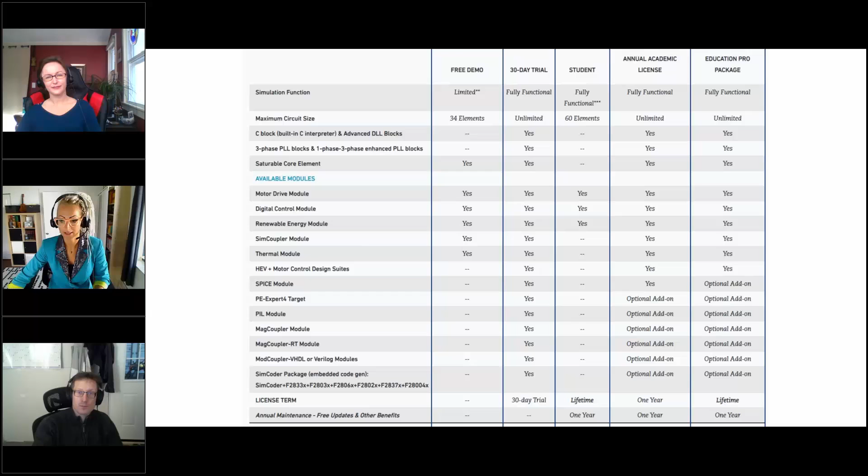Okay, that sounds great. Let's dive right into the first license option here, which is the PSIM Demo. Shannon, who is going to use this demo, or who is it going to be useful for?

A lot of students, especially undergraduate students, professors having them download it for teaching needs, or just anybody who wants to get familiar with the software before they start using it on a job, or just in general.

But it's not just showing the software. You can actually do some work with this? Yes, you can. There is a limit for the number of elements you have in a schematic, but there are hundreds of elements available, and there are limitations for simulation, but you can use it to do work.

Okay, cool. Albert, can you maybe show us an example of what can be done with this demo version of PSIM? What kind of application? Sure can. Let me share my screen. You should be looking at the right screen now. You should see that flyback converter.

Yes, great. Okay, so this is a simple little circuit, just one of the demo circuits. So if you run it, there's kind of two major limitations with the demo. One is component count, and then the other is the length of... sorry, that ran in the wrong engine.

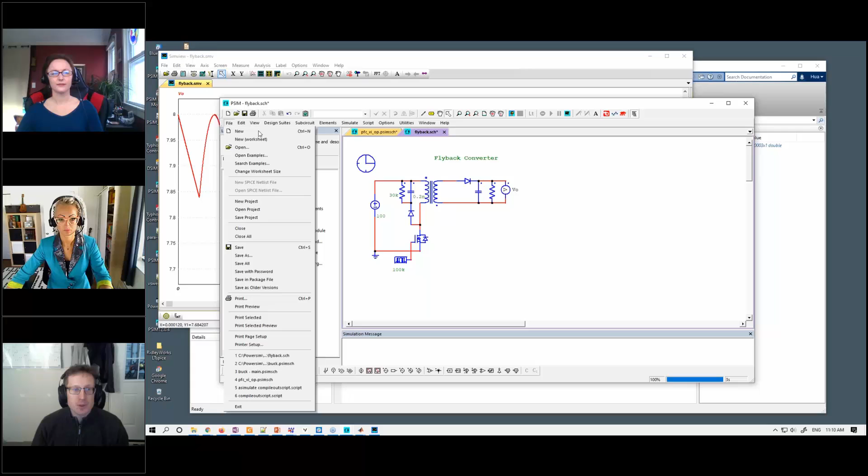So that is a combination of time step and total time simulated. And then you can see how many elements you're using — you can do element count, and we can see in this, there's 10. So the element count limit is around 34 for the demo.

So you could do something like this as well. This one has a number of more elements, and we can see that it's running, and it'll show some waveforms there too. So this is just the sort of thing the demo has. It allows for some simulation to be performed, but definitely for undergrad learning power electronics — simple buck and boost converters will be okay. But otherwise, anything more complex, and you're going to need to move to a different package. That's all I've got to say.

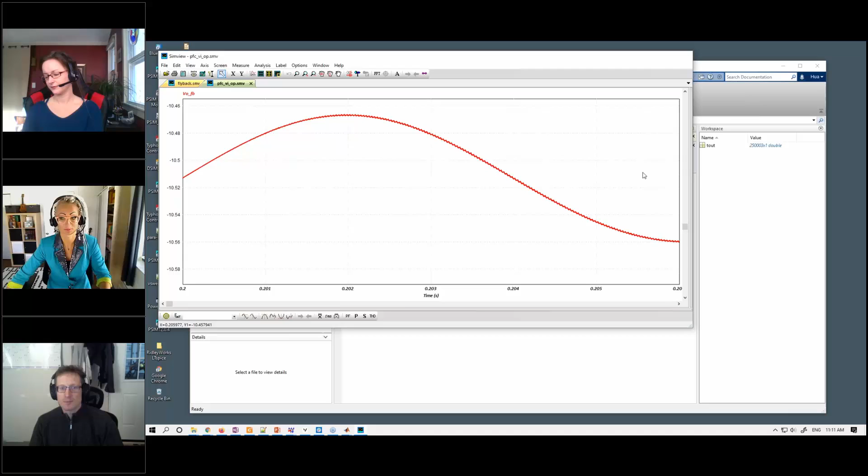Oh, okay, sounds pretty good. But it's interesting to see that this is not just a demo — you can actually do stuff, and it's free. So what more can you ask for? Exactly.

I'm going to take back the presentation here. Can you guys see the presentation again? Yes. Okay, good. Then let's get to our next license option, the next tier up — a student license that is also called a free teaching license. Shannon, why are there two different names for the same license, and what are the differences?

Sure, so they're both the PSIM student version. The student version increases the element limitation to 60, and it takes away the simulation restrictions. The PSIM student license — an individual can purchase it. It's a lifetime license, as it says here, $99. The free teaching license is really just to distinguish the license that a professor or teaching assistant from a university can request every year if they want it renewed — it's free and available for teaching.

So the difference is really just how long the license is valid and the price. Right. But functionality is the same. Same, Albert, functionality. Yeah. Which kinds of applications can be simulated here with this license, and where are the limitations compared maybe to the demo?

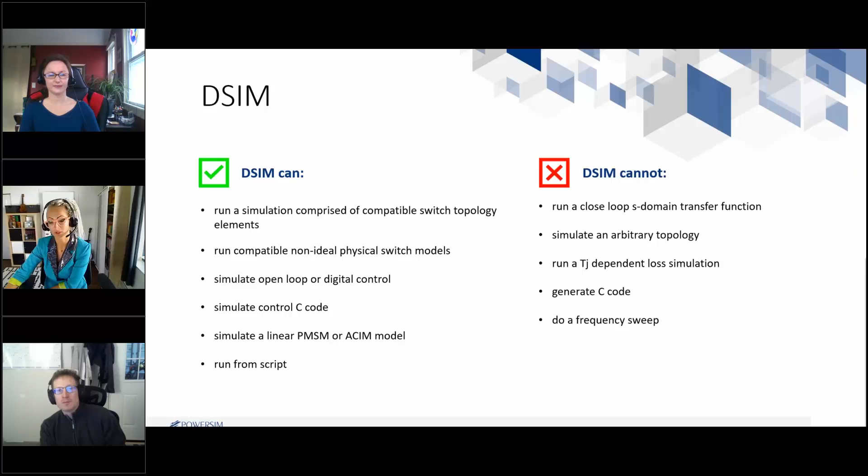Since we talked about DSIM, we might as well also talk a little bit about SmartControl. What is this used for, and why is it a good tool to use?

So SmartControl, if you've watched any of the tutorial videos I've done on power supply design, or come to any of the webinars where we talk about closing the loop, SmartControl is the tool I use. It is a graphical design tool. It plots a stable operating space for you with regards to crossover frequency and phase margin. It shows you graphically what relationships you can have when you design a PI controller, a Type 2 or a Type 3 controller.

You can work off a generic topology, or you can import your own frequency response, so you can even close the loop on things that are not power converters. If you have any frequency response and you want to design a controller for it, you can go from there. It's fairly robust. Once you are familiar with how it works, you can start doing things like defining equations for custom controllers or doing all sorts of other things.

But it's definitely a very easy to use graphical control design tool. As you tune your controller, it shows you the Bode plots for the loop gain transfer function, and it gives you a step response estimation. So it's a fairly powerful tool. Most of the tutorial videos that cover power converter design use SmartControl, so you can check it out there.

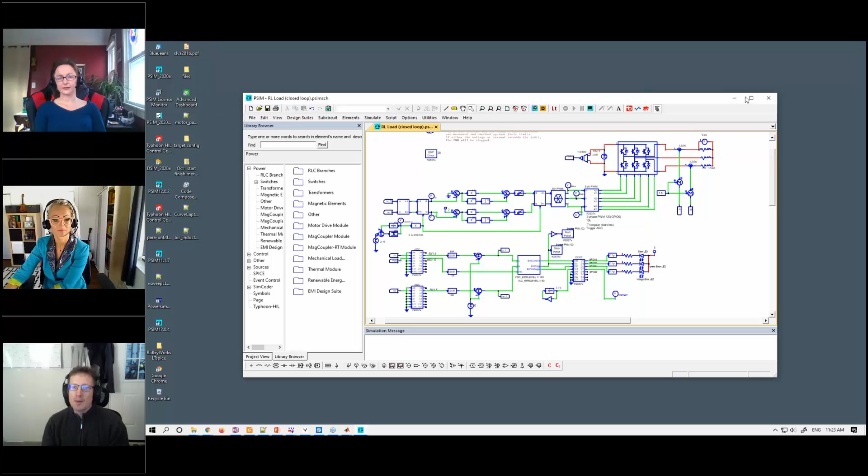Perfect. So the first simulation I'll show is a look at our motor control design suite. This is a good simulation that can be done with the Pro package. So we have an IPM drive here with an inverter. We've got field-oriented control, we've got MTPA, max torque per ampere control implementation, and field weakening.

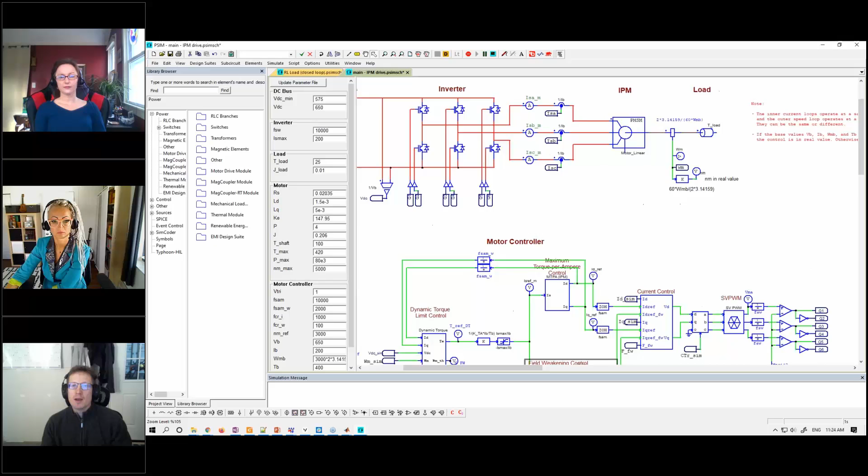Let's just run the simulation and we can watch what's happening here. So this is going to ramp up to 2,000 RPM, 3,000 I think, and then it will stabilize out. We can look at some currents here, the drive currents. But yeah, this is the kind of thing we can look at. Obviously, this is a much longer simulation than the ones we were looking at with the standard or the demo version.

You couldn't run this with a standard license. I definitely couldn't run it with the demo either.

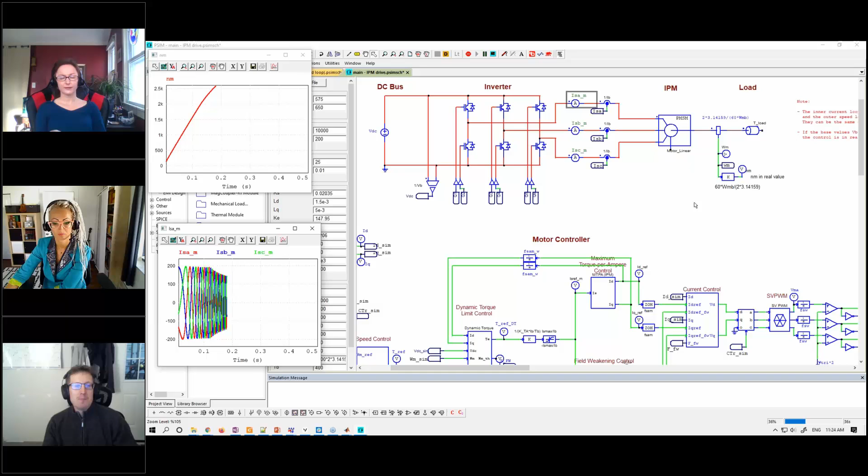But the nice thing here is looking at the design suite. Basically, this gives you a starting point for a motor drive simulation. You put in your motor drive parameters, and when you hit update parameter file, it will open up and calculate PI controllers for the DQ and speed loop. This is part of the base Pro education package.

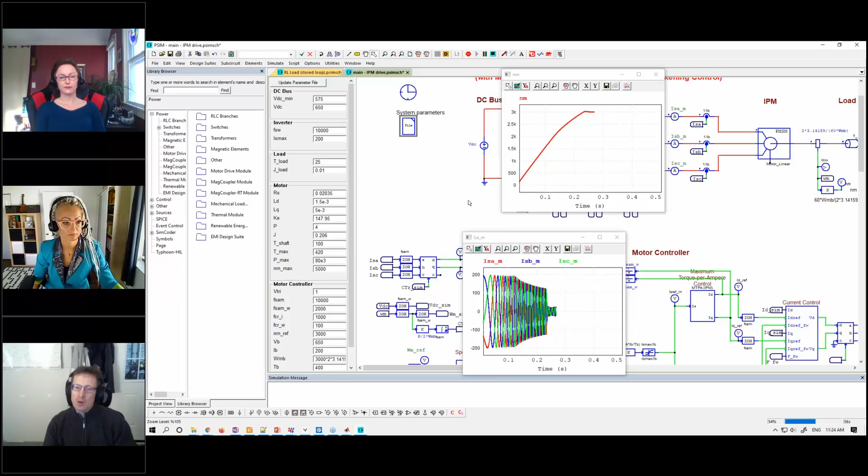Yeah, I'll just stop that. We don't need to go to the end there. You kind of get the idea.

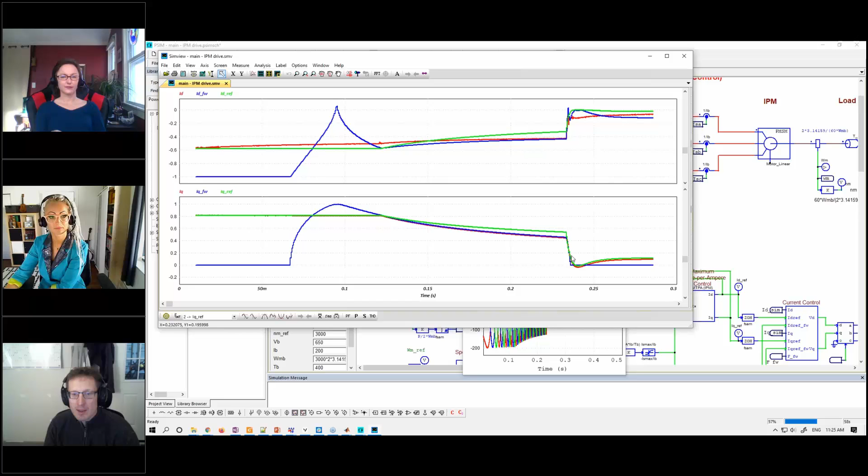So here's ID, there's the IDs, and then there's the IQ controllers working. There's a couple of regions here - the field weakening region that we see here. So we're regular, max torque per ampere up at the top, switch to field weakening in the middle, and then back to steady state over here.

Another simulation to look at is code generation. This is part of the... actually, I'll run the MATLAB simulation next.

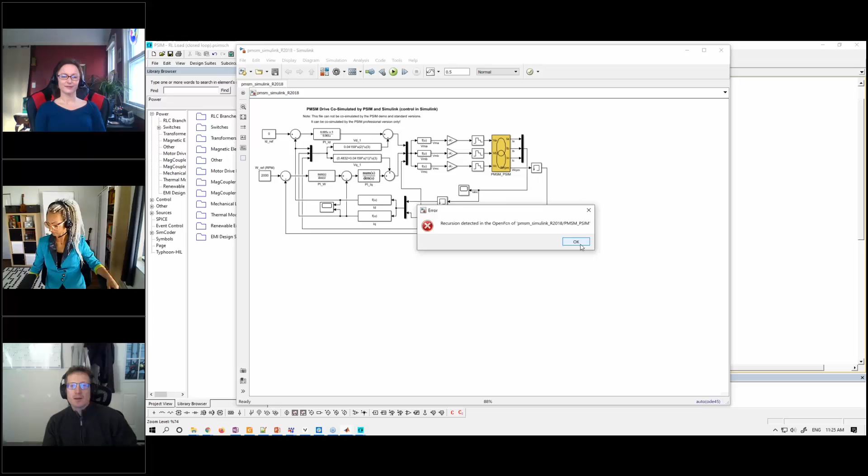So the other part you can do here is co-simulate with MATLAB or Simulink. Here's this motor drive in Simulink, and this is the linked block that points us to, if I double click, the schematic. So this is the schematic that's going to open - this is what is happening in PSIM. PSIM is handling the drive, the inverter, and the motor, and you can see these nodes passing information into and out of Simulink.

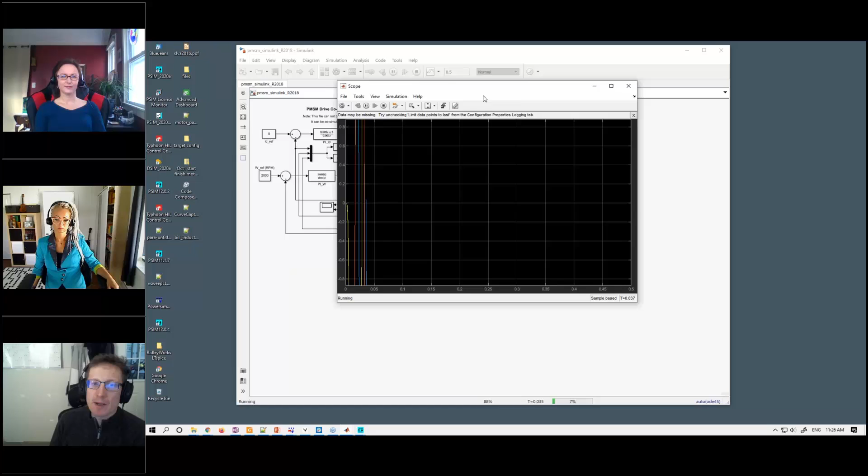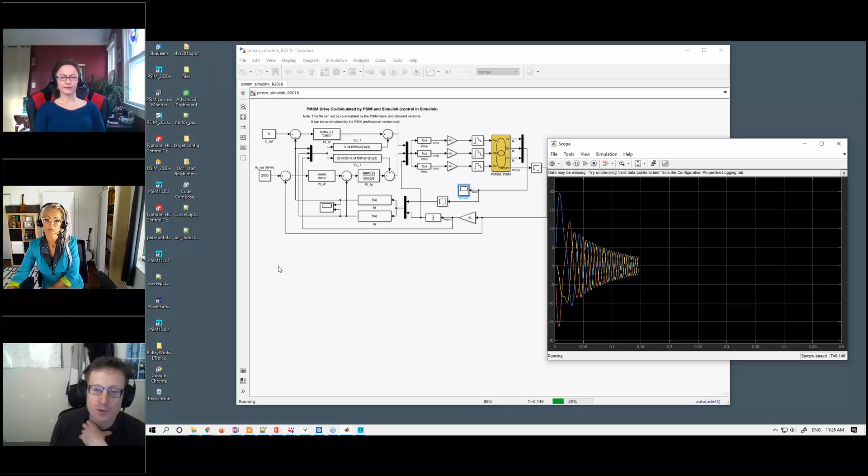So we can run this, and it will run. This is going to be a bit of a longer simulation than if everything were inside Simulink, or if everything were inside PSIM. Definitely trying to put as much of your circuit inside PSIM is going to give you a faster simulation for sure. But if you're running into convergence issues with Simulink, or you want to use one of our nonlinear models or whatever it is, you can link in this way without having to redo your whole control system that you would have had in Simulink.

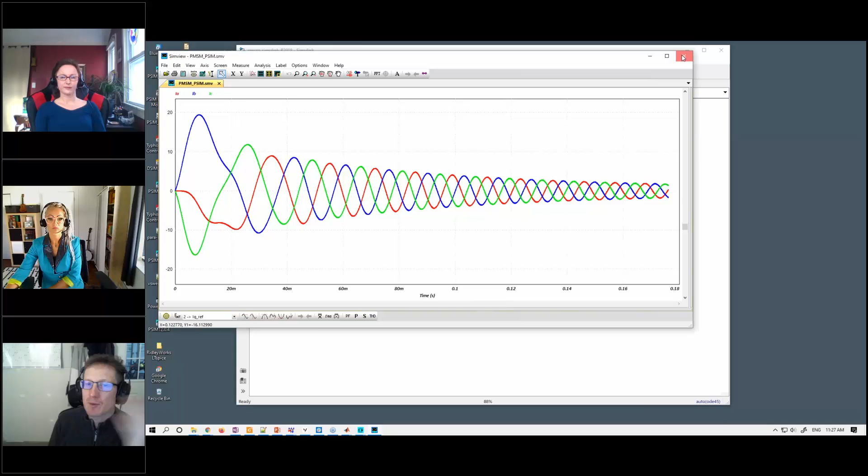We don't need to watch this one to the end either, you get the idea. At the end of it, you can look at the results in either PSIM or in Simulink, and you can pass the variables between the two - from Simulink down into PSIM or whichever. Okay, I'll close that up.

Now we'll look at the code gen. This is a look at our code generation - a three-phase inverter with DQ control. We can simulate this; the important part with our code generation is we can simulate these and look at what's happening when we run the simulation.

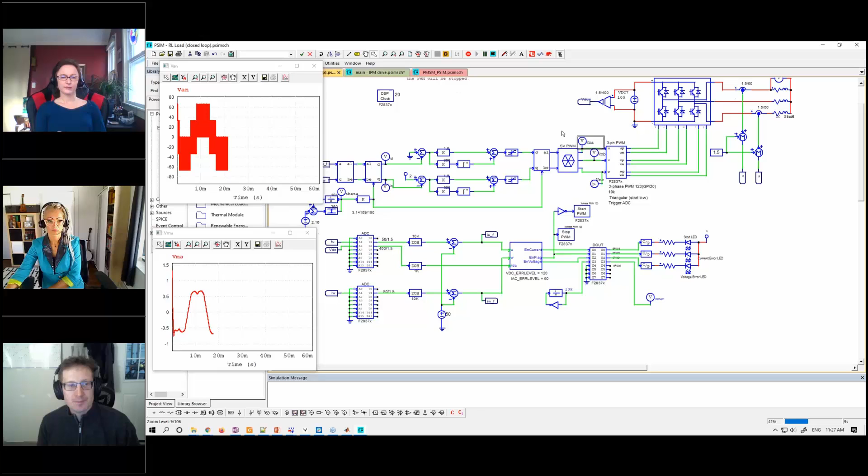So we can see this going, and we've got these code generation elements in here. You can see this one's for the F28x target, the PWM block here. If we launch that open, we can see the options we're given - dead time, switching speed, interrupts, ADC triggering, all that kind of stuff. This is all inside of here.

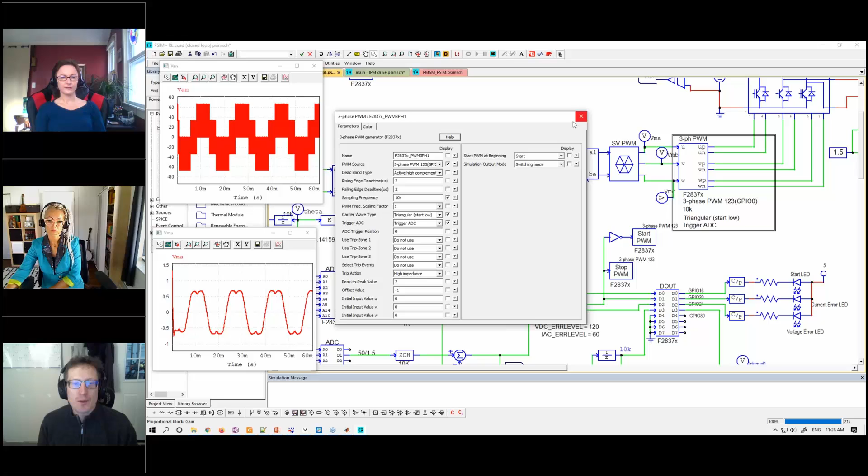So what we can do is, let me just change the name of this to academic - we'll change that one, and we'll change this one to underscore PSIM. So I will simulate and generate the code.

This is the C code that gets generated. We're defining this, and it's not just the C code - we're generating a full project. So you'd be able to look at the generated folder. There are tons of webinars on this as well, but basically we just import this project into CCS, and we get to go.

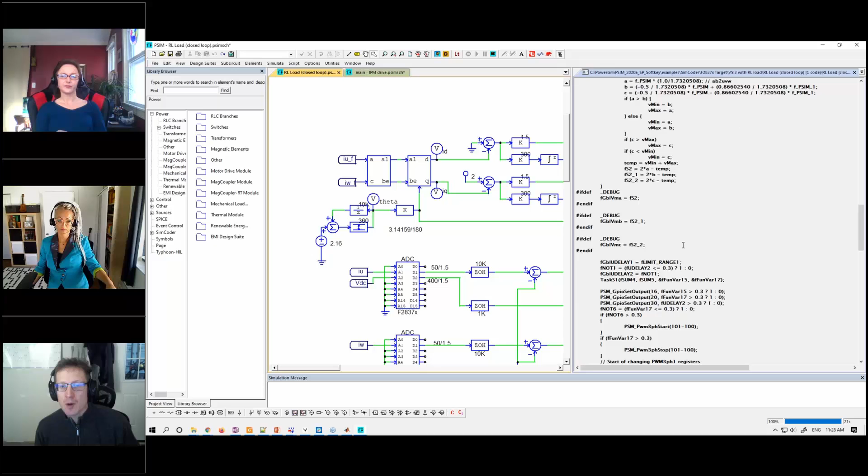The C code that gets generated allows you to easily use these processors. I'll highlight how the C code works - if we look at this task, we're fetching the ADC results right here, and then you can see F_academic, this line right here. It corresponds with this block, which is the ABC to alpha-beta transformation, and we can see the math for this brought out right here. I also changed the name of that other one to F_PSIM, which is here - PSIM - and this is doing the DQ to alpha-beta transformation.

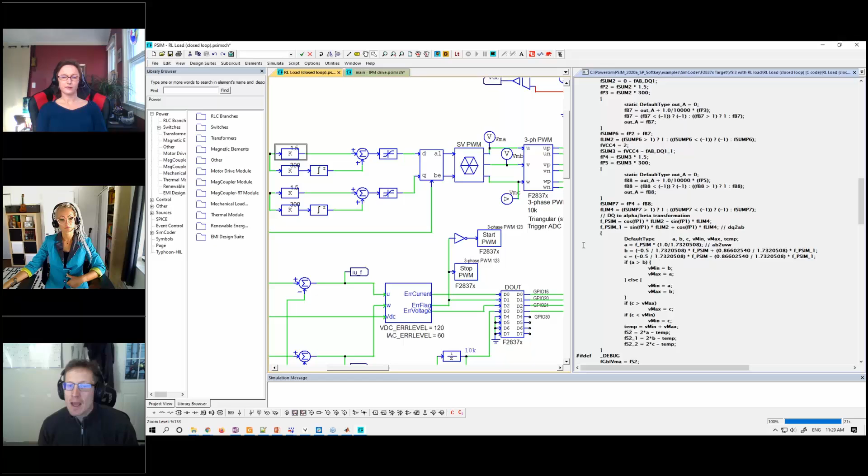So every element in the schematic ends up with a variable in the code. The code is as efficient as your schematic is. The function calls and the updates of all that kind of stuff compares very well to the base TI projects that get built.

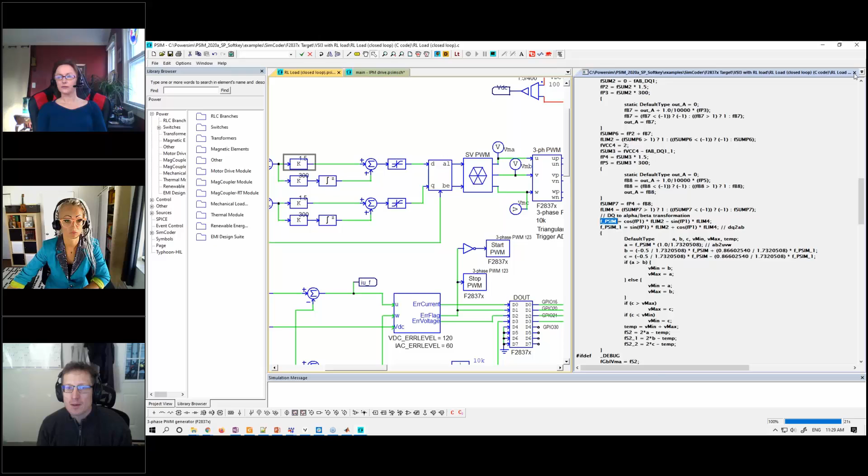Yeah, so that's with regards to PSIM. Do we have time for me to show a quick SmartControl example? Yeah, please, sure. Okay, we'll open up SmartControl.

So SmartControl, again, we get this pop-out window. We can design here if I get my little drawing tool going. So these ones are generic converters we can work with, sorry, predefined topologies, or we can go off something generic down here. Erase all drawings, go back to pointer.

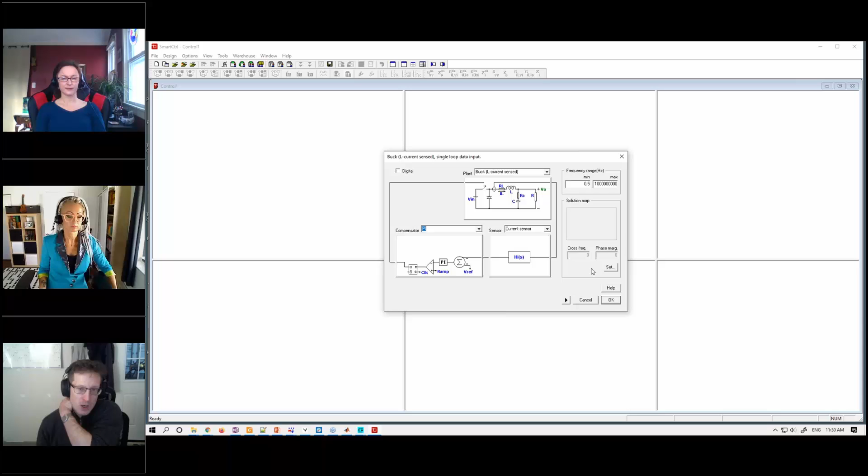So let's just work off of a single loop converter here, and I'll just load up the basic system of defaults. The whole idea is that we're working off of a transfer function for the plant, a transfer function for the current sensor or feedback sensor—be it voltage, current, speed, or whatever you're sensing—and then your compensator.

And so then you click an operating point, and as you're inside that operating point, we can see that it's stable. If you go outside of that zone, you end up in bad news bears territory. So you can pick your operating point, and then this links to PSIM—you can export this to PSIM.

Let me just put this on my desktop. And we'll go this way. So here's our—I'm not sure those were the limits for the—yeah, let's just go minus 1,000 and 1,000.

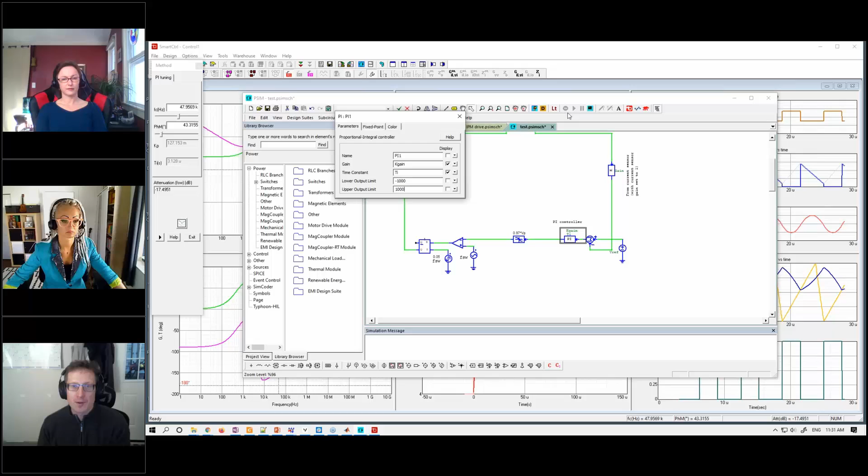All right, so there's our current control. I could have done a better job picking an operating point, but you get the idea. And yeah, so that's SmartControl in a nutshell.

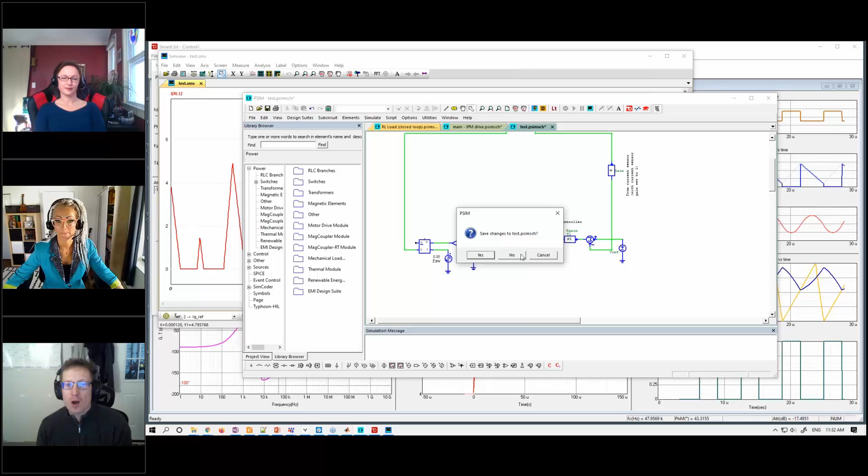So you can work off of the built-in topologies, or, the way I do it in the tutorial videos, you can import a frequency response. In PSIM, if you go to Help, Video Tutorials, and check out the power supply design videos, all of these show the use of SmartControl in a generic fashion, regardless of what the power stage would be. So you can import the frequency response from PSIM into SmartControl and devise a controller that way. Analog and digital control is handled.

That's all I got to say about that. Is that the end of your demo? Yeah, I don't have any more demos to show unless someone has a specific question.

I could do a DSIM simulation if someone was interested. Do we have time for that? Can you show how quickly that goes? Because we claimed earlier that this is the fastest solver in the world, so I guess we cannot just say that and not show anything.

Proof's in the pudding, or proof of the pudding is in the eating, or whatever the expression is. Shannon, I know you know what it is directly. I don't know.

Yeah, so let's—yes, you should see my screen still. So let's look at a big simulation here that I know takes a decent amount of time to run. Examples, here we go. Oh yeah, so we can run this one. This is a 50 kVA solid-state transformer.

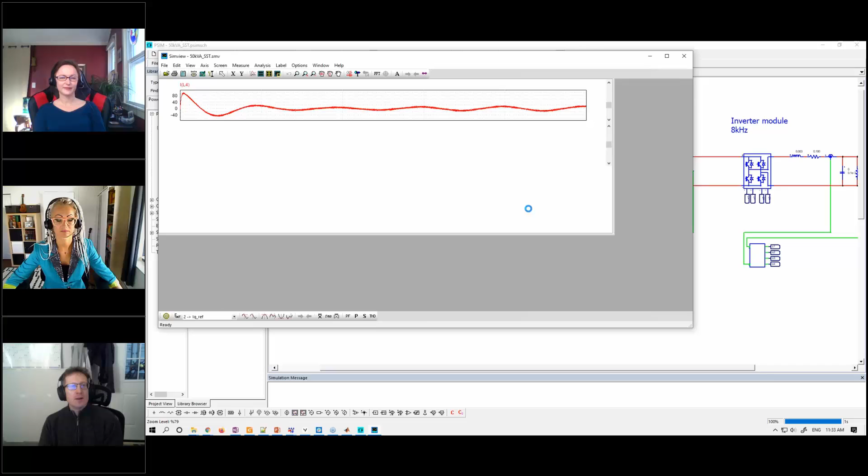And that's done. So that was 100 milliseconds worth of simulation done in just under a second. We can see there's a number of 24 switches in the simulation, all switching at different speeds. And then what else can I say? Yeah, we can go back.

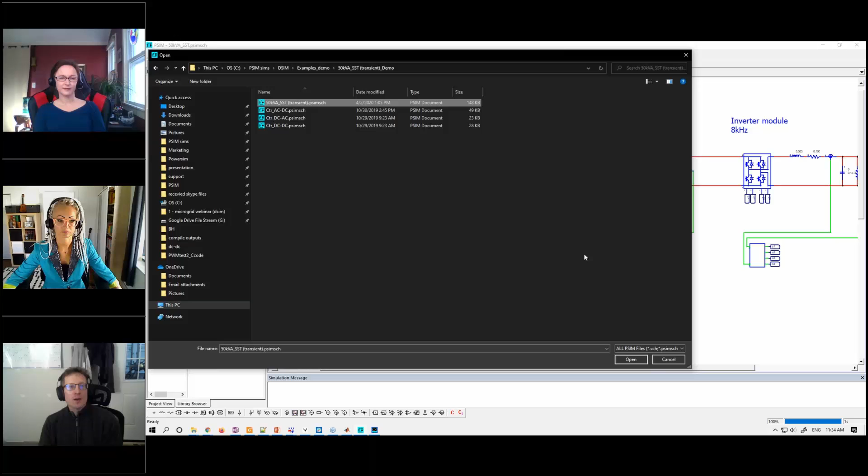And the other strong suit of DSIM is the transient models. So we can look at the switching transition in detail as well without too much of a slowdown—this is really also very impressive. So now we're running detailed models of the IGBT, the silicon carbide MOSFETs here, and the IGBTs back here.

So the parameter set here is pretty broad. I won't go into it—there are other things to talk about—but we're looking at the exact transitions now. We can see in the inverter this current overshoot and this voltage overshoot as well. We can zoom in and see a little bit of ringing on the voltage, and we can see some other things going on here as well.

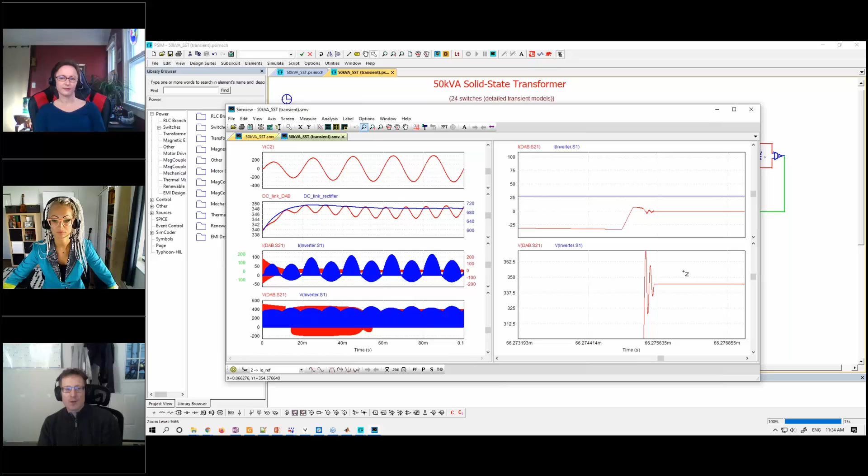So this is now showing us the transient response based on whichever device model we wanted to work with. And that was only—so when I'm on a web conference, things are about twice as slow. So this 15 seconds on a web call would be 6, 7, 8 seconds without anything else going on. And how long would that take in PSIM?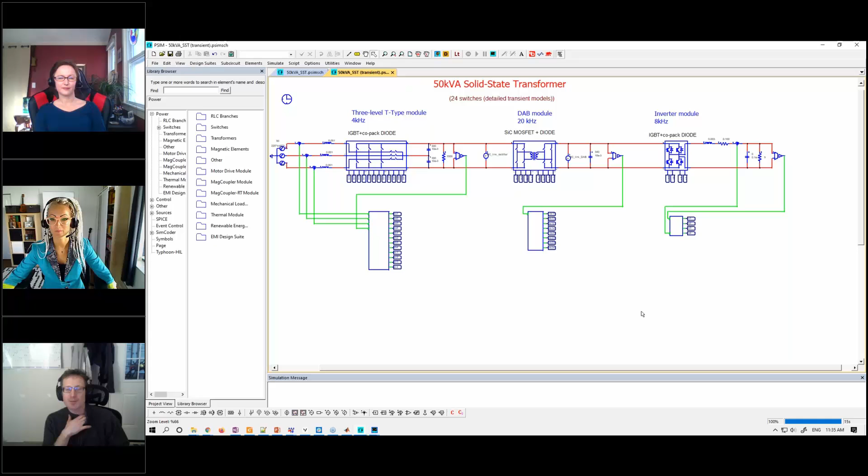For 100 milliseconds with detailed switch models, you would be looking at the better part of 2 to 3 hours. Okay, that is quite a difference. Yeah, it's quite a bit faster.

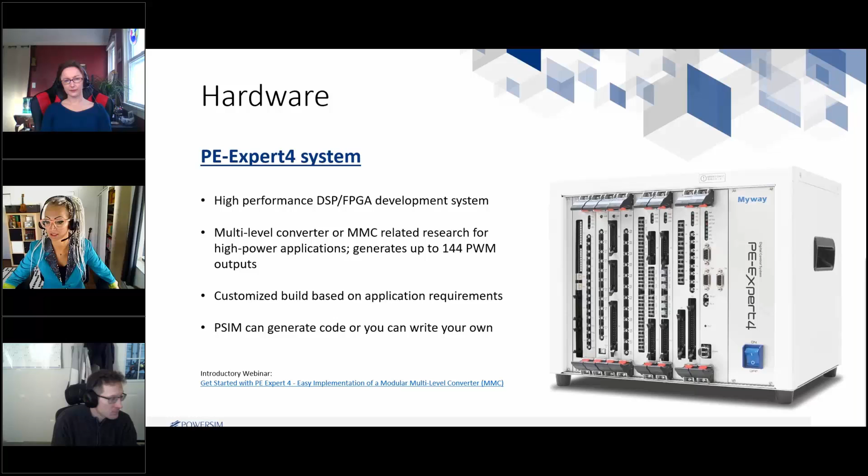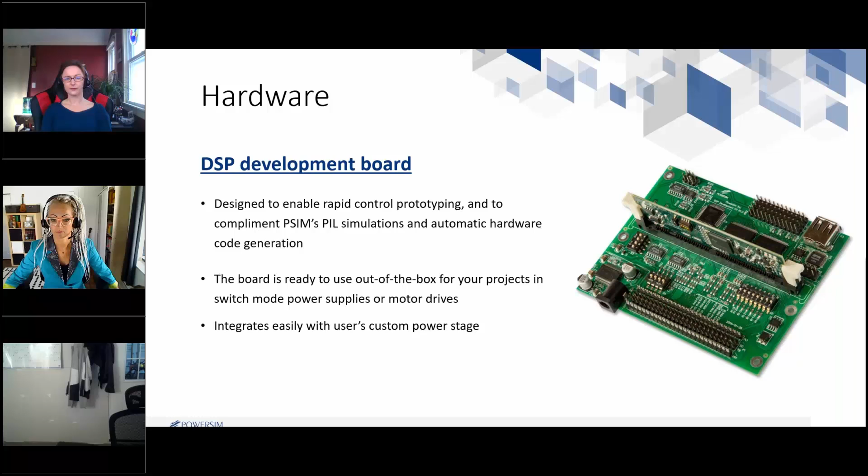Oh, pretty cool. And you mentioned DSP boards, and what we haven't mentioned yet is that we also sell a DSP Development Board. Yeah, let me just grab mine over here. So this is the DSP Development Board that we sell.

It's got the DIMM100 slot in the middle for the TI control cards, so you can put your DIMM100 based TI control card in here. The newer Delfino processors have a different footprint, so we might be revving this soon to accommodate those. Basically, this is a nice little development board for inverter control. You need to provide your own power stage, but we level shift the PWMs for you, isolate the digital inputs and outputs, and buffer the analog feedback signals on this thing. It's also got built-in JTAG, plus CAN bus ports and JTAG ports.

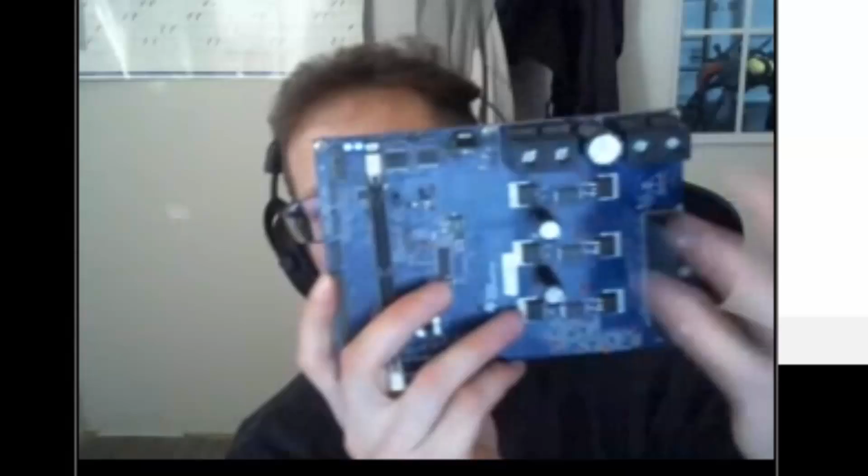Basically you can get going pretty quickly with one of these, as opposed to something like the TI development kits. This is like a TI development kit with a power stage already, which forces you to use that power stage, whereas with this you can build your own power stage and have it do what you want.

Yeah, and with that, you have really all you need to simulate and design power electronics converters, motor drives, and microgrids, right? Yes.

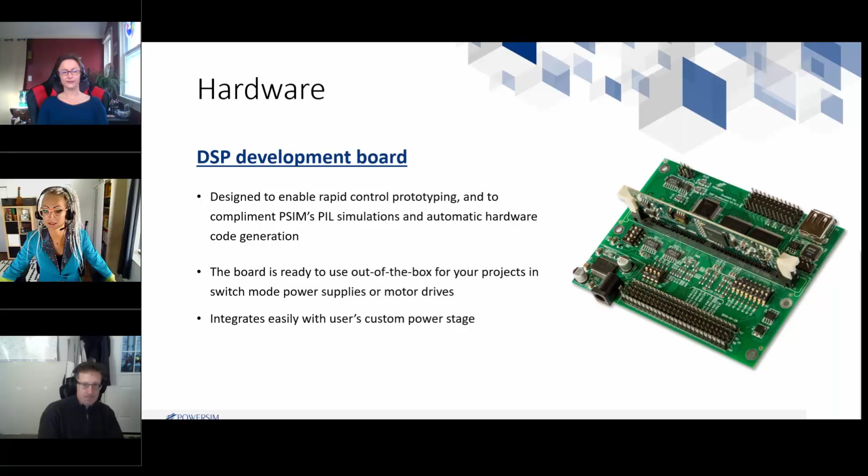Okay, cool. And now the big question that probably a lot of people have is, what does this cost? Like some of these license options, we've seen some free ones, but there's some that you need to pay for, and we have great discounts for academia compared to our industry prices. Shannon, can you give us a little overview and maybe an example of some price application?

There are sometimes universities that will purchase a student license in network for their network, and they purchase that as a permanent license instead of renewing every year. So there would be cost steps up for the network, but not too much.